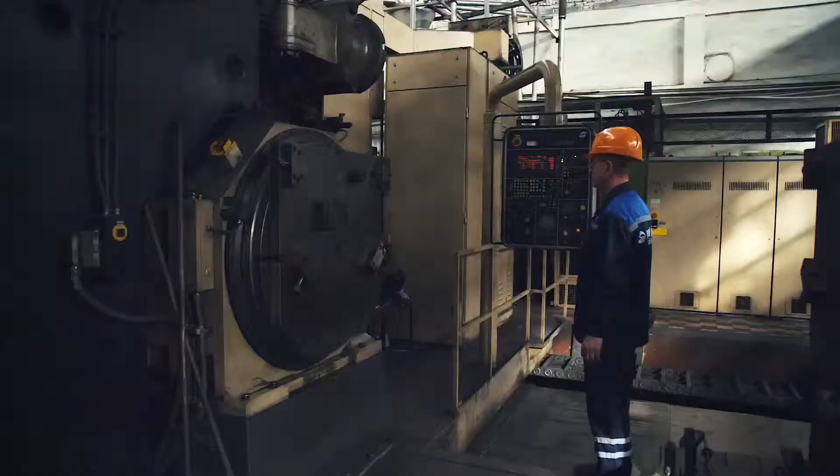Nowadays, we produce and deliver diesel and gas piston power stations on the basis of engines of our own and foreign manufacturers. Our gensets are characterized by high reliability, efficiency, low level of noise, vibration and toxicity of the releases, available components and inexpensive consumable materials.

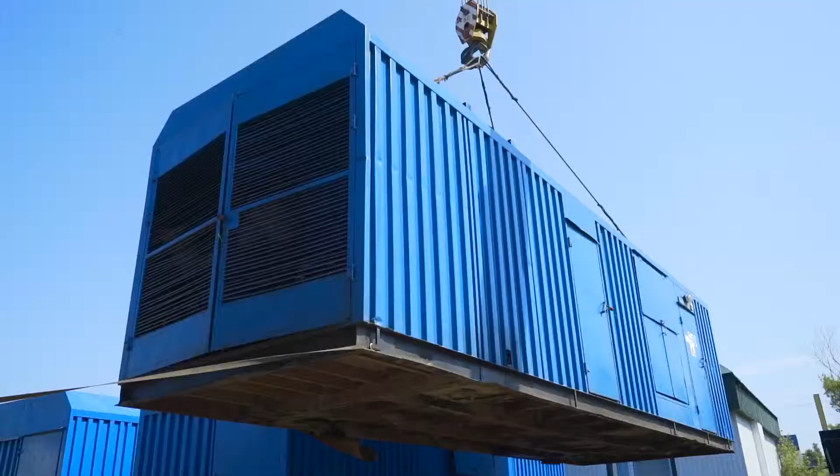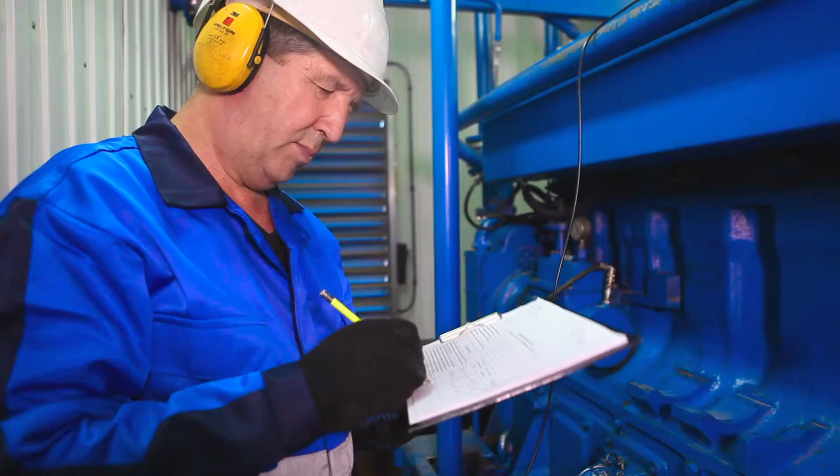Power stations do not require special maintenance, and are easy to install and operate. The specialists of our company can quickly resolve the issue of set delivery to a facility and carry out the entire complex of works necessary for the first start of the power station.

The main consumers for temporary power supply services are drilling companies, oil companies, rural settlements of the far north, enterprises, teams for the overhaul of wells, shopping malls, gas stations, and enterprises for the extraction of mineral resources.

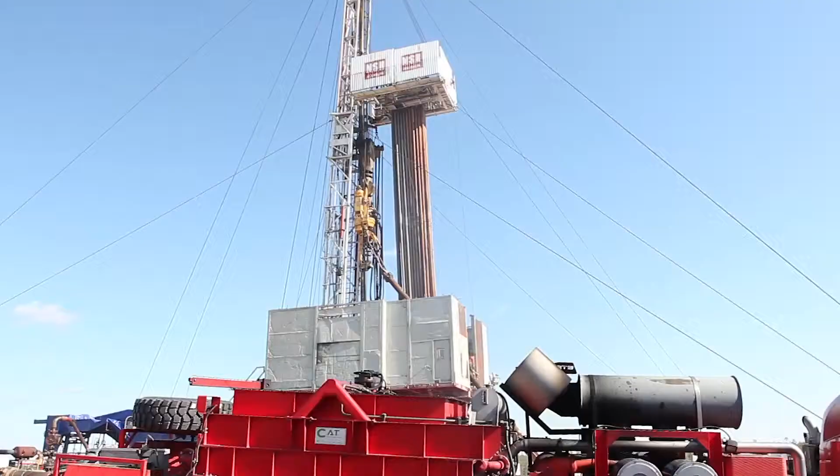Small-scale power generation is in demand among drilling and oil companies operating in taiga, in places where there are no centralized electrical networks. There is 70% of territory like this, mainly in Siberia and the far north of the Russian Federation. To pull through many miles of impassable areas, the line of traditional power supply is not only time-consuming but also very expensive. Small-scale power generation solves this problem.

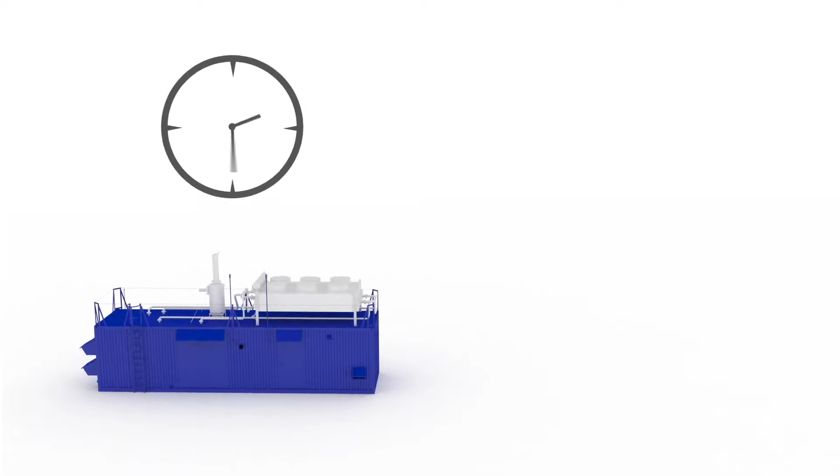We offer a full package of services: design, production, delivery, installation, and the mobilization of our private service for independent power complexes. These power centers can significantly increase the reliability of power supply to manufacturers, and eliminate the need to purchase power from network companies or to construct power lines for newly built facilities.

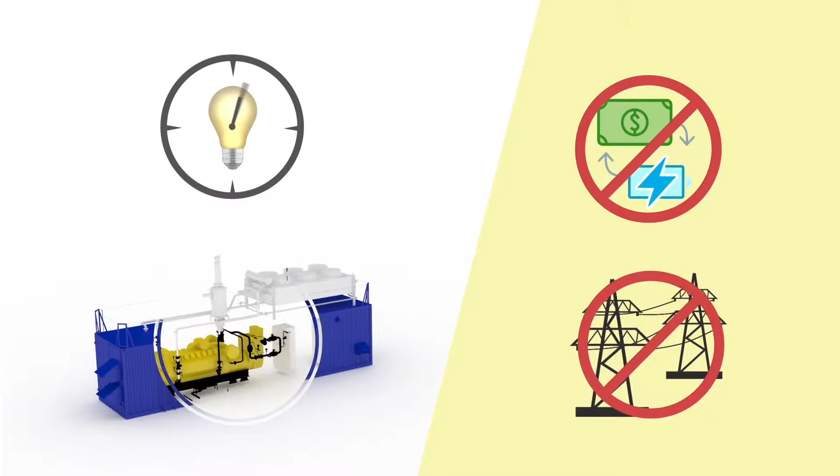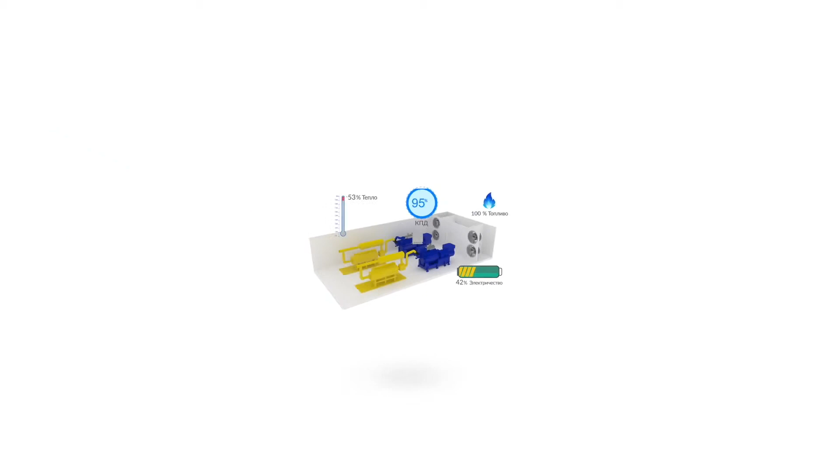Gas piston power stations can be equipped with a cogeneration system and obtain thermal energy through a heat exchange system. In this case, the amount of thermal energy is almost equal to the amount of electric energy, which allows for an even greater economic effect. Efficiency tends to 95%. The received thermal energy can be used for heating buildings, obtaining hot water supply, and also used in a trigeneration system, that is, for receiving cold.

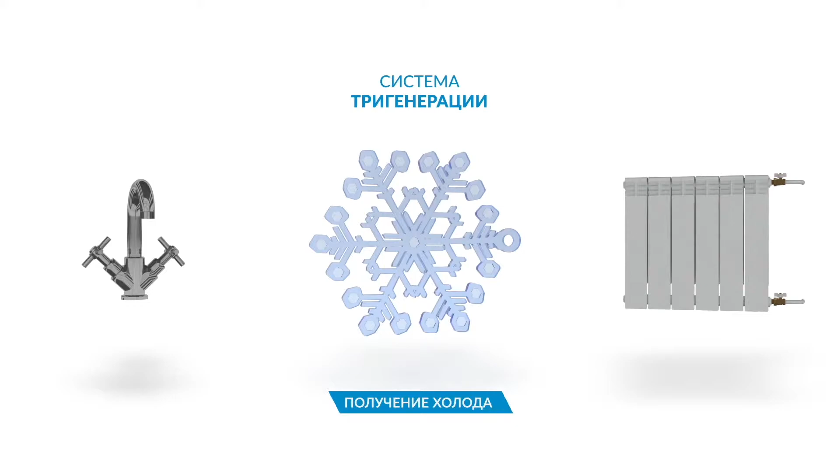In the case of an energy complex acquisition, the greatest economic effect can be obtained at facilities which have 24-hour operation and which use gas piston power stations with a load in the range from 80 to 90% of installed capacity. At the same time, due to the low cost of electricity, the payback period of the project can be about 3 years.

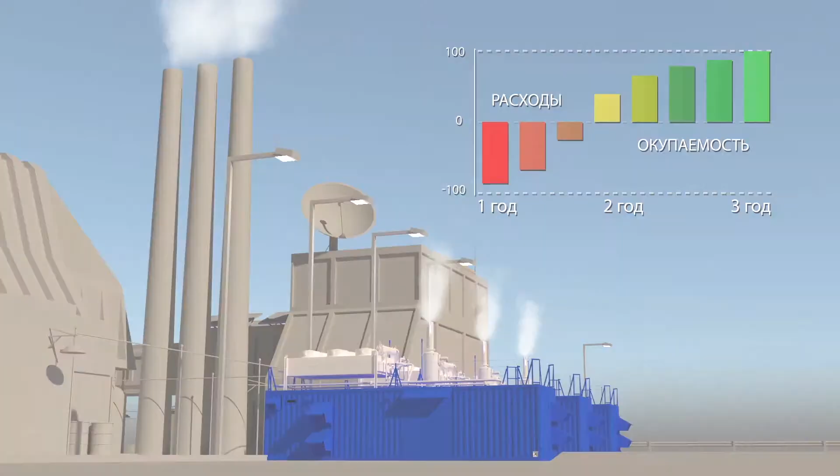Until recently, the beneficial use of associated petroleum gas was not among the priorities of oil and gas companies. The associated petroleum gas was separated from oil and burnt in flare units directly on the production field. For many years, the flame of these torches illuminated the night sky over the mining regions and was one of the symbols of the oil industry in Russia.

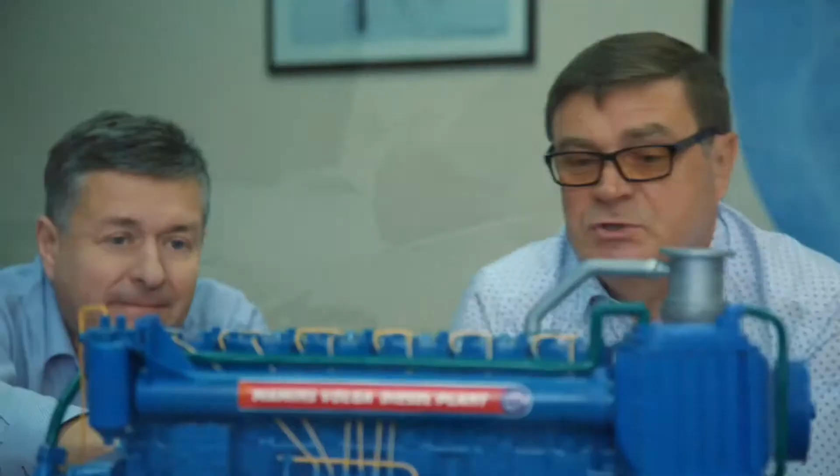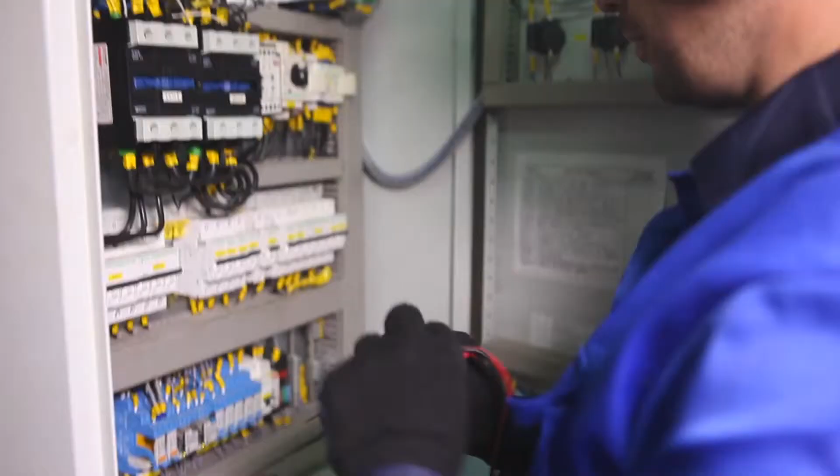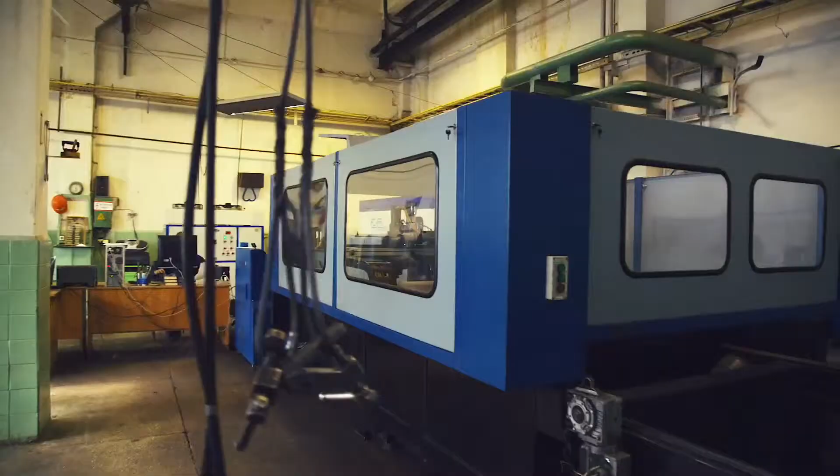We offer a full range of services, from design and construction to the maintenance of the energy center by our professionals. Specialists of our enterprise successfully operate and service power systems of drilling rigs, cluster pads, and mining fields in general. Hundreds of our power stations are successfully operated in different climatic conditions, providing facilities of various industrial sectors with their own electricity. Our products are well known for reliability, maintainability, attractive price, and simplicity of fuel use.